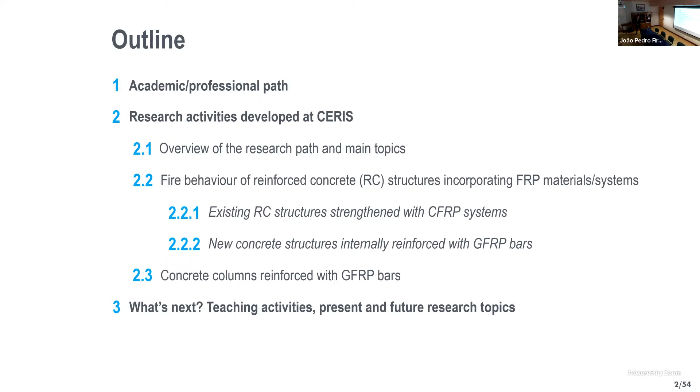Some personal facts: I was born in Cascais. I'm now 37 years old. I'm married, father of 2 boys, Francisco and Pedro, 6 and 5 months old. My basic education was done in Sintra, where I currently live.

My university education was done here at Técnico. I got my master's degree in civil engineering, specialization field of structures, in 2010. Then I proceeded with my PhD studies, also here at IST, which I concluded in 2015. In both cases, I was supervised by Professor João; in the case of my master's thesis, Professor Paulo França was also here at IST.

And my PhD thesis, as I said, was supervised by Professor João and also by Dr. Mário Arruda. During my PhD studies, I spent a few months abroad at the University of Edinburgh.

So my PhD studies were funded by an individual FCT scholarship. Then I applied and succeeded to an individual postdoc FCT scholarship, hosted by CERIS and ISISE. At the middle of this 6-year scholarship, I was hired by EIB and hosted by CERIS as a junior researcher. At the middle of this 6-year contract, I applied for an individual contract from FCT as auxiliary researcher, and very recently I was hired as assistant professor at IST.

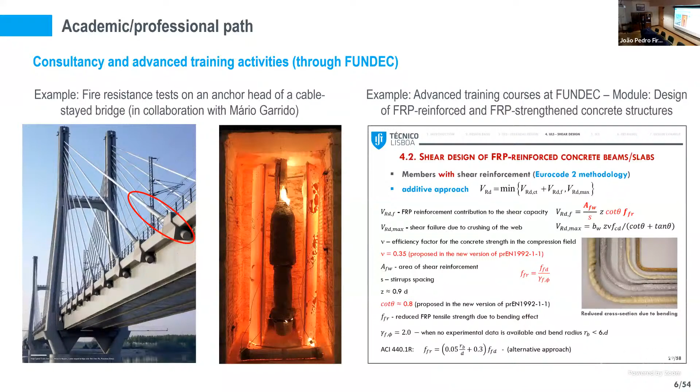This slide shows some examples. On the left, some pictures of work I was involved with in collaboration with Mário Garrido, where we helped a company develop a fire protection system for the anchor head of a cable stay bridge. We also did tests here at IST to validate this system. Here is a picture of the protected anchor head, and this is the system after the fire resistance test. On the right, some examples of training activities I've been involved in, where I was responsible for a module of one course regarding the design of concrete structures with FRP materials and systems.

So, moving on to the second part of this lecture.

But first, I would like to acknowledge all the people that made this research possible, especially the PhD students that I was lucky enough to supervise across these years. Special thanks to Wallace, Inês, Pietro, Adriana, and Elisa. This is truly a teamwork.

The research that I'm about to show you is the result of our work. Special thanks to Mário Arruda, who has been supporting all the numerical studies I've been involved with during the last years. Also, a special thanks to the laboratory technicians who made all the experimental tests possible. And last but not least, my scientific supervisor, but more than that, my mentor and role model, Professor João Correia, since the first time we started working together back in 2009.

So it has truly been a teamwork, and what I'm about to show you is the result of this teamwork.

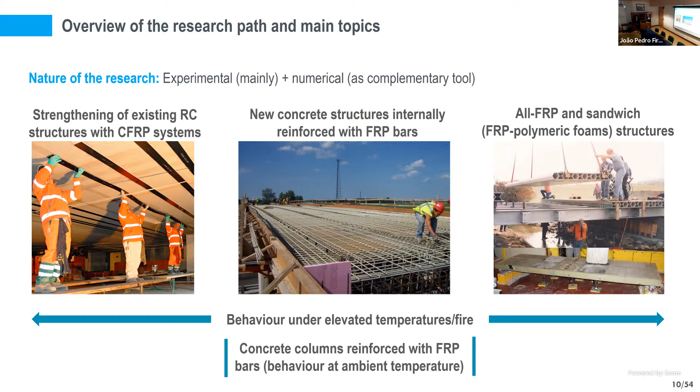So the first topic, my first steps in research at CERIS, started in 2010 with the development of my master dissertation in civil engineering on the fire behavior of RC structures strengthened with CFRP systems. I continued researching this during my PhD and then during the postdoc phase of my career, supervising one PhD student and six master students developing dissertations related to this topic. This research was funded by three research projects.

Later, in 2016, I started working on concrete structures internally reinforced with GFRP bars. This was part of my postdoctoral program that I applied for with FCT, but also anchored in the supervision of two PhD students and six master students who developed their research on this topic. This research was funded by an FCT project and is being funded by CERIS in an ongoing internal project.

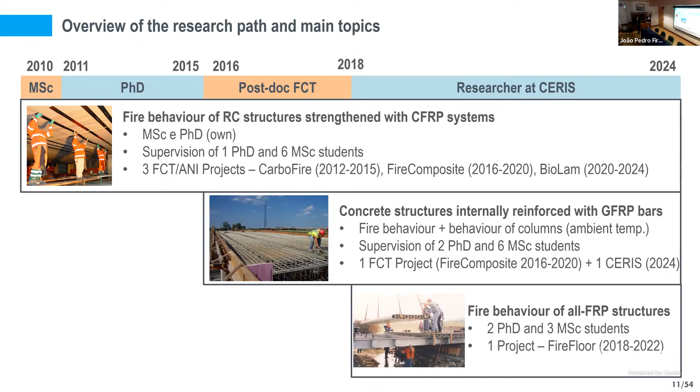The last topic I started working on in 2018 was the fire behavior of all-FRP structures, anchored on the supervision of 2 PhD theses and the contribution of 3 master students, funded also by 1 FCT project. So now, describing very briefly some highlights of the research on the three topics I mentioned, starting with the fire behavior of RC structures strengthened with CFRP systems.

To give you brief context and motivation for this topic: these systems have been successfully used over the last 3 decades to strengthen existing RC structures, and there is a significant number of applications worldwide where these systems are applied for concrete confinement, flexural, and shear strengthening.

Although they behave very well and are now being designed worldwide, there is also a well-known problem with this system, which is fire behavior. These systems do not present a very good fire behavior because both materials involved, the FRP material and the polymeric adhesive used to bond the FRP to the concrete surface, are highly affected by temperature. When heated, these materials undergo a glass transition process, and during this process their properties are highly affected. We can see the reduction of material properties of both the FRP materials and the adhesive, and the adhesive is much more affected by temperature than the FRP itself.

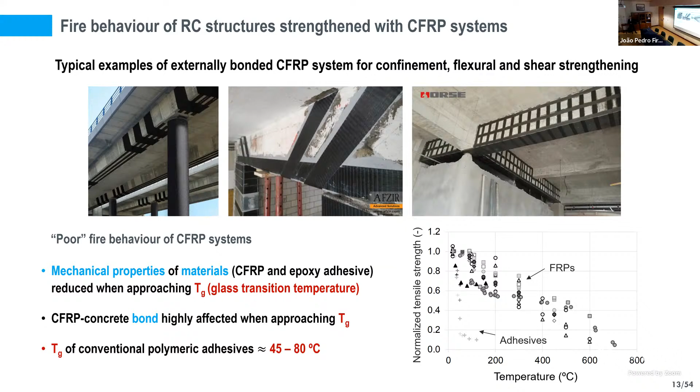As the adhesive is responsible for connecting the FRP material to the concrete surface, the bond behavior is highly affected. When we started investigating this topic, research was relatively scarce, and the design codes available at that time recognized the problem but did not provide a solution for it. So a designer wanting to check the fire safety verification of these systems had no information available. This was the starting point of this study.

The first step was done in my master dissertation in 2010, where we did some preliminary tests on this topic, and the conclusions were interesting at that time. We did fire resistance tests on beams strengthened in flexure with CFRP systems, and concluded that if we protect only the anchorage zones of the system, the CFRP system was able to withstand load and contribute to flexural strengthening, even after the bond of the CFRP to the concrete was destroyed at the central point.

By protecting the anchorage and insulating the system, we were able to explore the contribution of the system through a cable behavior, as you can see. With this system, only providing insulation at the anchorage, we observed that we were able to attain 23 minutes of fire resistance, which, by the way, is not enough for typical building requirements.

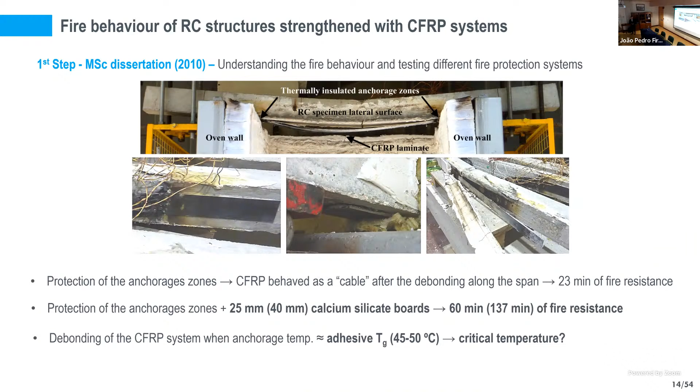But we also confirmed that combining insulation of the anchorage zones with additional insulation at the central part of the system, we were able to attain fire resistance times that fulfill typical building application requirements. And we also concluded that probably the glass transition temperature of the adhesive could be considered as a critical temperature to be used in the design and safety verifications of this system when related to fire safety.

So the first step was my master thesis. Then we proceeded with this investigation during my PhD thesis, where we decided to investigate this topic in further depth. For that, we divided the research into two main parts. First, we focused on a deep understanding of the bond behavior of CFRP-concrete interaction at elevated temperatures.

For that, we designed an extensive experimental campaign. Those tests were performed at LNEC, and this was complemented by numerical studies. Then the second part of the study was at a different scale of analysis. We moved to the structural member scale, where we tested beams and slabs under fire, combining fire resistance tests with numerical analysis.

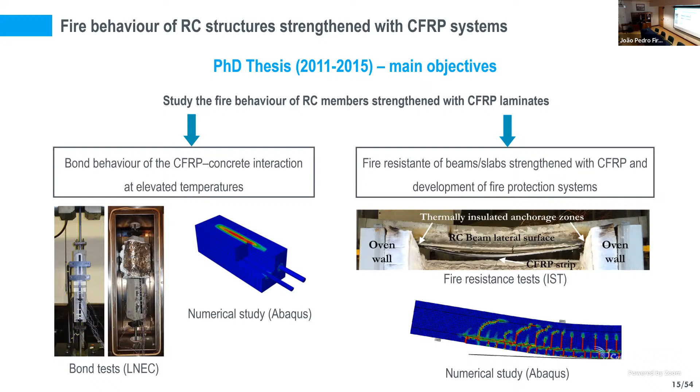Regarding the first part, the study about the bond behavior of the CFRP to the concrete, we decided to investigate the influence of different parameters that I will not describe in detail here, but we studied the influence of different application techniques: EBR, which stands for externally bonded reinforcement, where the CFRP is bonded at the surface, and also NSM, where the CFRP material is bonded inside grooves opened in the concrete cover. We investigated the influence of different parameters, configurations, and materials.

With this experimental campaign, we were able to obtain new data for the literature at that time, providing results about bond strength reduction with temperature for all these strengthening system configurations, also providing new data regarding stress distributions along the bonded length and how these stress distributions change with temperature and across different materials.

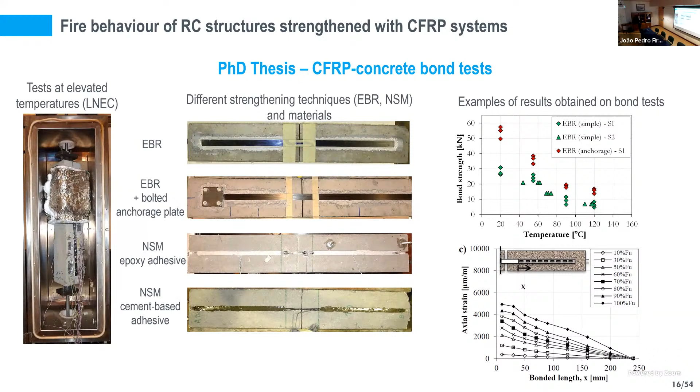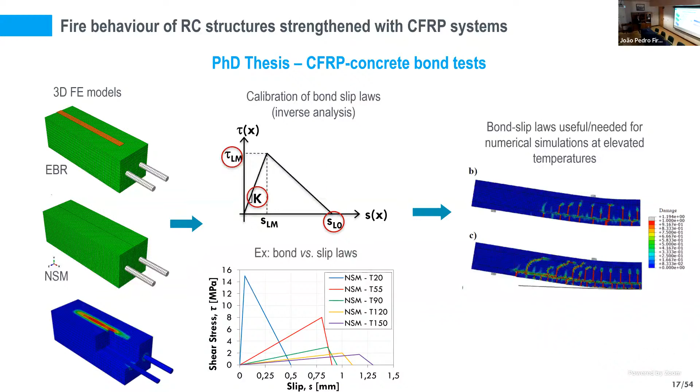Using new data available at that time in the literature, we were able to calibrate bond slip models, also new to the literature. These bond slip curves were very useful and important for numerical simulation analysis of concrete members strengthened with these systems under fire. With these calibrated bond laws, we were able to explicitly simulate the debonding of the CFRP system during fire, which was a significant advance in the literature at that time.

But those numerical models needed to be calibrated with experimental data, so we also performed fire resistance tests to compare with numerical results. Here is the fire resistance test setup at CERIS laboratories, where we use a furnace that follows a typical standard fire curve.

This furnace applies a heating curve to the bottom part of the member being tested, which is subjected to the fire action and simultaneously to a constant load. In this case, we adopted a 4-point bending configuration, simulating a typical load scenario expected in a fire load combination.

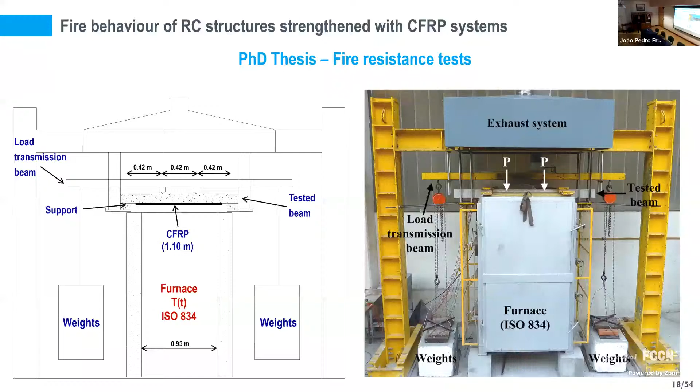These were the tests performed at that time, with some pictures exemplifying what we observed. When the CFRP system was left unprotected, we confirmed that it is very susceptible to fire action - the system debonded after only 2 minutes of fire exposure when left unprotected.

Applying the fire protection system only to the anchorage zones, we were able to exploit the cable behavior I mentioned before, and with this we extended the fire resistance up to 15 minutes.

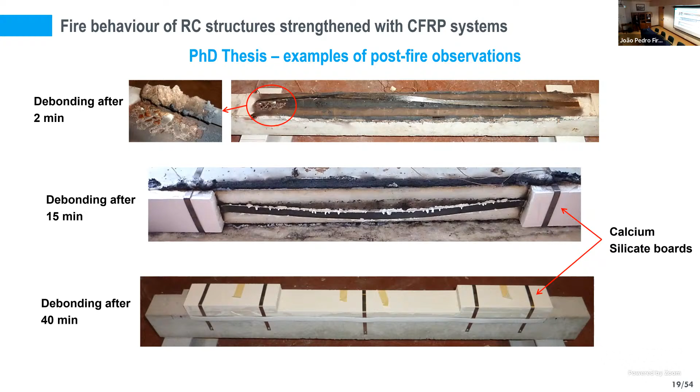Again, not enough for typical building requirements, but combining thicker insulation at the anchor zones with thinner insulation elsewhere, we were then able to extend the fire resistance of the strengthening system, which was our initial goal.

So with the different configurations of fire protection and materials that we tested, we were able to find a solution for the problem described before.

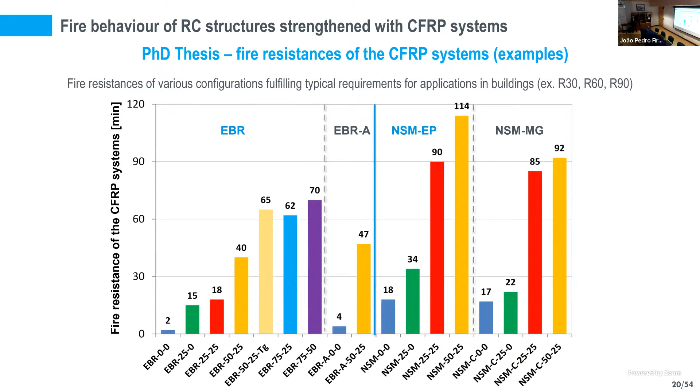But designers usually don't have time to perform such complicated numerical simulations as those I mentioned, nor the time and means to perform fire resistance tests as I did in my PhD thesis. So at the end of my PhD thesis, our goal was to draft and propose a simplified design methodology for the design of fire protection.

We proposed a very simple methodology based on exploiting the cable behavior I showed before, which can be defined in two main parts. For the design of the thickness of fire protection at the anchorage zones, this thicker layer of protection is defined based on critical temperatures we also defined during my PhD. The thin layer of protection for the central part of the system should be designed to avoid tensile failure of the FRP material.

The material should be designed to avoid exceeding a certain limit temperature, to avoid that tensile failure of the FRP that I mentioned before.

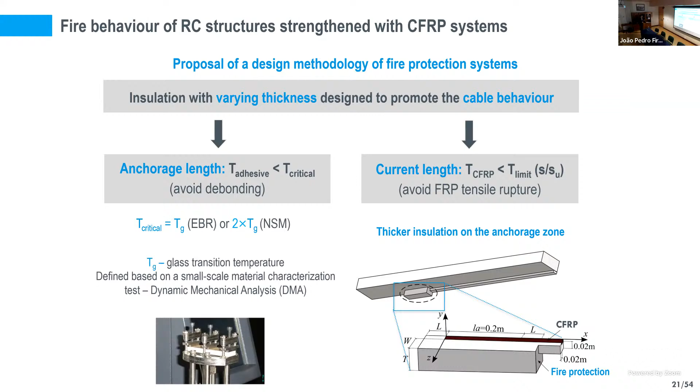In terms of main contributions of this research, significant new data was provided to the literature regarding the CFRP-concrete interaction, and also regarding the mechanical contribution of the CFRP during fire, which was one of the main topics not fully understood in the literature. One of the main contributions was the design methodology I just mentioned, to protect the systems and fulfill typical building requirements.

At the end, we were really happy to see that this research was recognized in one of the most adopted design codes for these systems, which mentioned our study and our strategy of applying thicker insulation at the anchorage as a possible reference to solve the problem related to the fire resistance of CFRP systems.

We were also happy to see our publications used in real-world applications. Here I show a picture of a real-world application in Portugal, where fire protection was designed. I was in direct contact with the designer of the system, and he actually used our results and publications to select the fire protection for that concrete slab strengthened with CFRP systems.

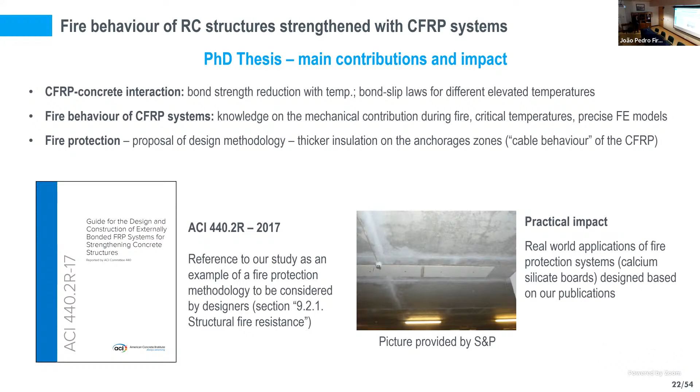So that was the study I did during my PhD, but that topic was further investigated during my postdoctoral research, in the framework of my postdoctoral FCT scholarship, and also an FCT project that funded that research after my PhD, highly anchored on the PhD thesis of Adriana Azevedo, and also receiving contributions of master students who developed their dissertations in these topics. The objectives after my PhD were to consolidate the research I developed previously, making improvements on the experimental and numerical methods used during my PhD, but also expanding that knowledge to other variants of CFRP strengthening. We also established collaboration with associated industry and other institutions to proceed with the investigation on this topic.

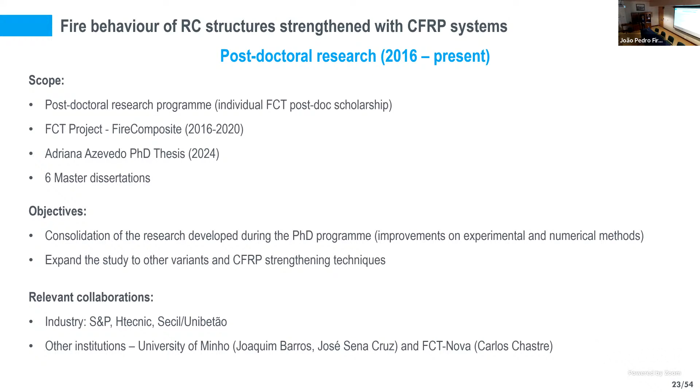Let me show you some examples of the improvements we made on this topic. Here I show one of the improvements we did on the experimental methods used to characterize the bond behavior of the CFRP systems to concrete at elevated temperature. During my PhD, here at Técnico, we did not have the experimental capabilities to test or characterize this behavior, but during my postdoctoral research, we managed to find the means to do these tests. We developed this test setup that allowed us to complete, in a more detailed way, the experimental results and knowledge previously acquired during my PhD.

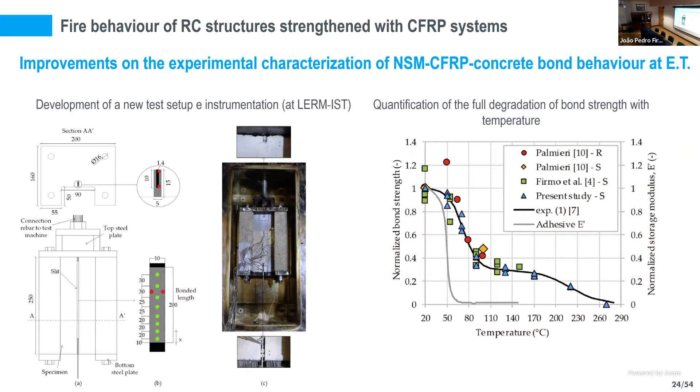We were also able to develop a numerical tool that uses the experimental data from the bond tests to calibrate local bond-slip laws in a much more automatic and optimized way than I did during my PhD. So this was also an additional development on this topic.

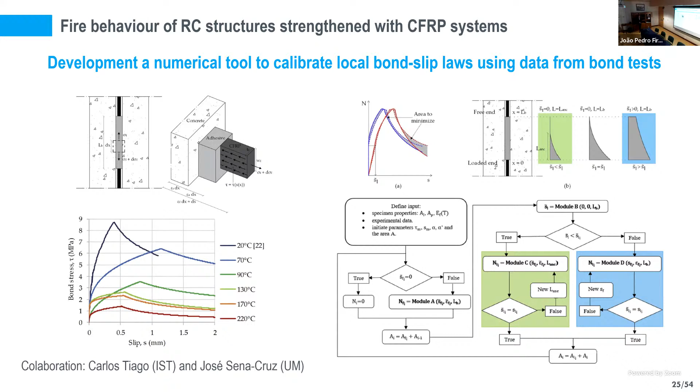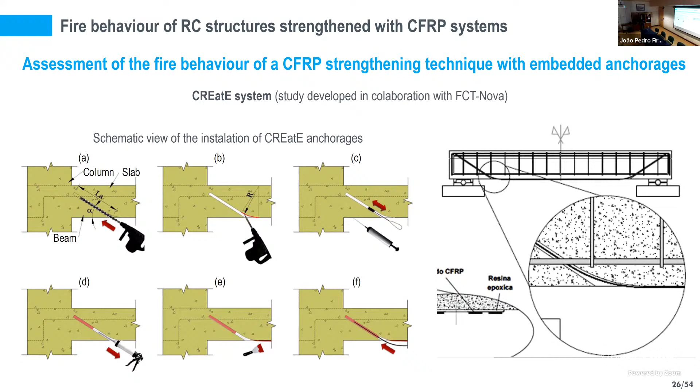We also assessed the fire behavior of different variants of CFRP strengthening systems. Here I show one of these systems, a CREatE system, which is basically anchoring the CFRP laminates into holes drilled at the anchorage zones of the CFRP system, close to the supports, providing better anchorage capacity. We assessed the fire behavior of this system, and for that we designed a new experimental campaign where we directly compared the fire behavior of these systems with the NSM system, the CFRP laminates bonded inside the concrete cover, and with the traditional technique where the CFRP is bonded at the surface.

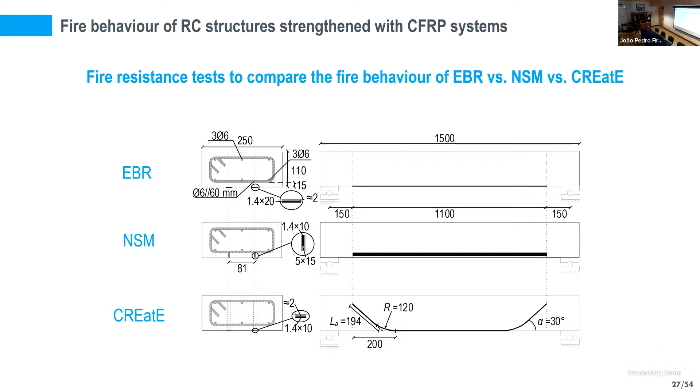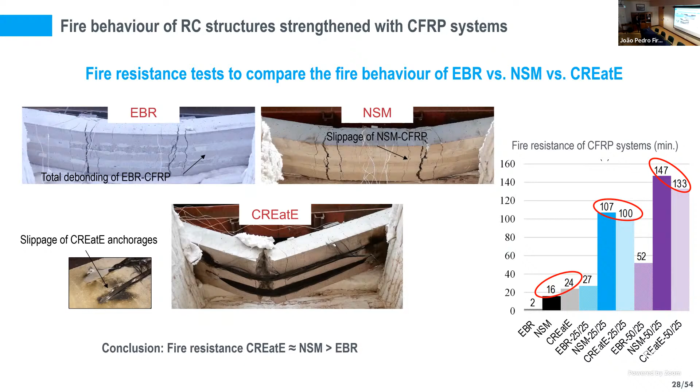The main conclusions of this study were that both the CREatE system and the NSM system behave much better under fire than the traditional EBR system. Using the methodology for fire protection I mentioned before, we were again able to attain fire resistance times that fulfill typical building requirements for common applications.

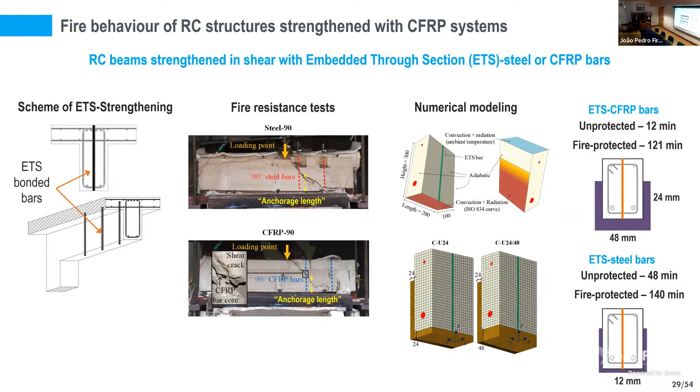Finally, we also investigated the fire behavior of RC beams strengthened in shear with the ETS method - embedded through section method - where the strengthening material is bonded inside holes drilled at the middle of the cross section of the concrete member. For that, we developed a new test setup complemented with numerical modeling, and concluded that when unprotected, these systems are relatively susceptible to fire, with relatively low fire resistance times, but we were also able to provide some solutions to increase that fire resistance. This is only one slide summarizing the study, but this research, including the development of the test setup and calibration of numerical models, took more than 2 years.

Moving on to the next topic: fire behavior of new concrete structures internally reinforced with GFRP bars. This study was developed in the framework of my postdoctoral research program submitted to FCT, funded by an FCT project, anchored by Inês Rosa's PhD thesis, and with contributions from 6 master dissertations. We were able, in the framework of this research, to establish very relevant contributions with associated industries, especially world-recognized producers of these bars.

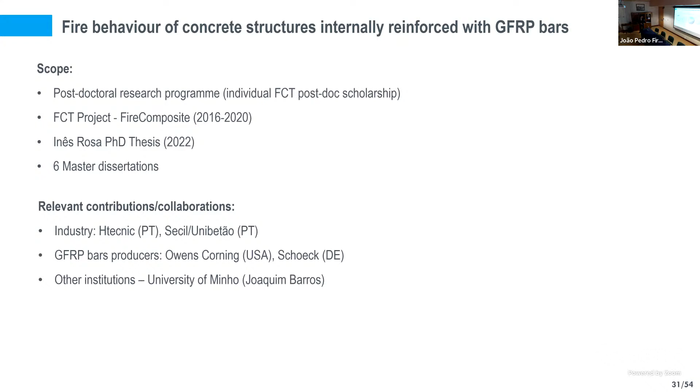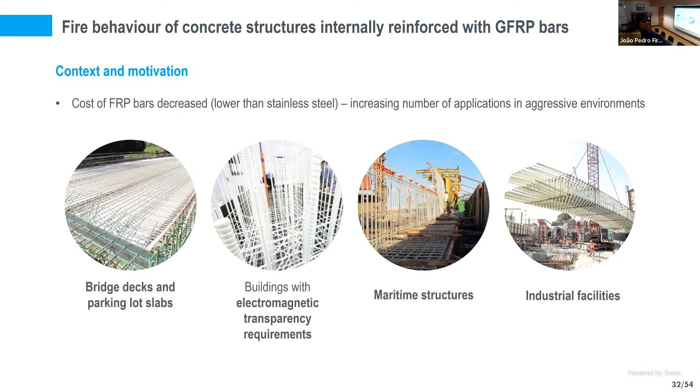To give you brief context and motivation for this study: applications of GFRP bars as an alternative to conventional steel bars are increasing worldwide. We now have a significant number of applications where durability of conventional steel reinforced concrete would be a problem, so this is an alternative to stainless steel reinforcement. The increasing number of applications is due, on one side, to the reduction in prices of these bars, but also to the technological maturity of these materials and the knowledge that has been produced.

So the advantages of these technologies are very well known. These FRP bars are very light. They present a very high strength, but the main advantage is that they do not corrode.

However, they present a brittle behavior. The elastic modulus, especially when dealing with GFRP (glass fiber reinforced polymer) bars, is relatively low when compared to conventional steel. Bends are possible, but they are still made on factory.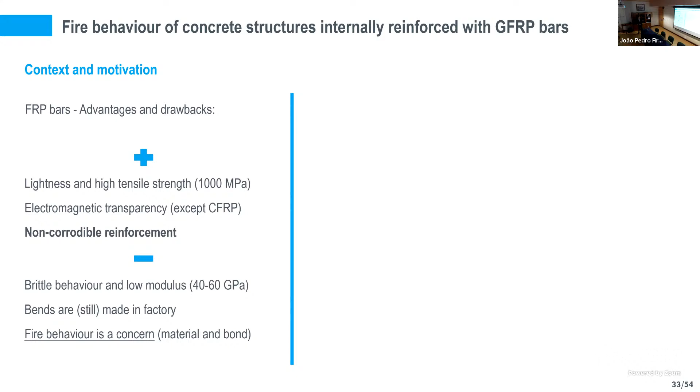And the problem, one of the biggest problems of this technology, was the fire behavior, which was our main focus on this research. And in fact, the research community also recognized that problem, not only because the FRP material degrades very fast with temperature, but also the bond of the FRP bar to the concrete is also highly affected by temperature.

Codes that were available at that time recognize the problem, but they do not provide concrete solutions, or they provide very conservative recommendations for designers.

One of these recommendations I would like to mention is the one provided by the Canadian Code, which said that to have a concrete member reinforced with GFRP bars with 60 minutes of fire resistance, we should adopt a minimum concrete cover of 60 millimeters - this for an FRP bar whose main advantage is not being susceptible to corrosion.

It's a non-rational use of these bars, because if you are adopting a very high concrete cover to solve the fire issue, we are not taking advantage of the high durability of this material.

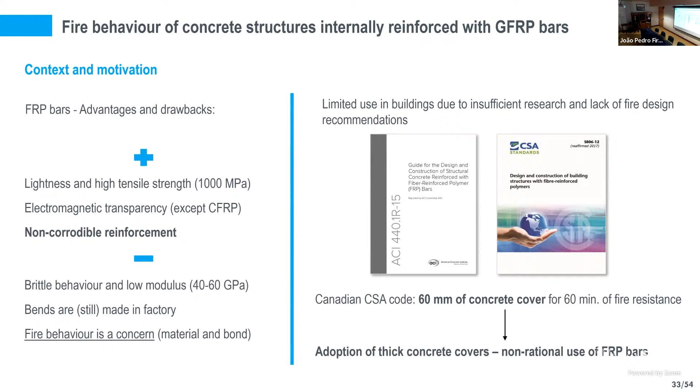So when we started studying this problem, this was the context. We tried to provide some answers and new solutions to this problem, and for that we designed a research campaign that involved different scales of analysis.

At the material level, we first started characterizing the GFRP bars at elevated temperatures, determining the tensile strength and the elastic modulus at elevated temperatures. Then we moved to the scale of the connection between the GFRP bars and concrete at elevated temperatures.

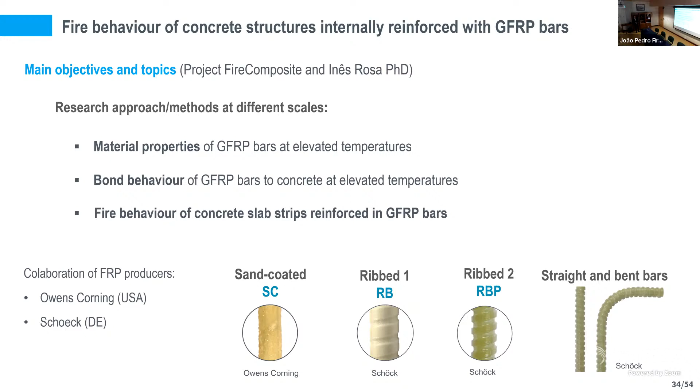At a different scale of analysis, we moved to the fire behavior of concrete slab strips reinforced with these bars. We established a collaboration with FRP producers that provided us different types of GFRP bars with different surface finishes and also different geometries, and we assessed the influence of all these parameters.

So on the first scale of analysis, we were able to quantify the degradation of the tensile strength and elastic modulus of the different types of GFRP bars, which is a basic material property that we needed to proceed with this investigation.

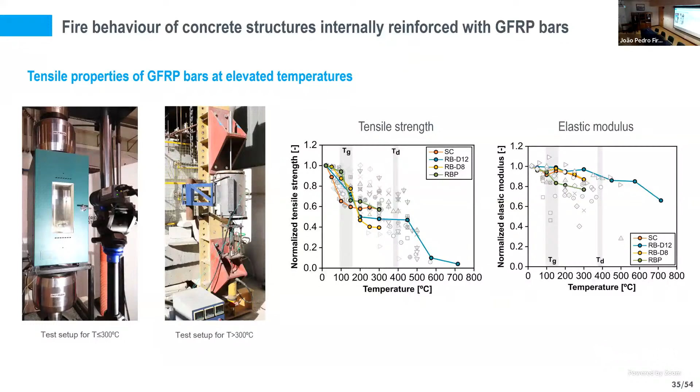But the results available at that time in the literature were very scarce. And although it seems to be a simple test, it's quite challenging, and we provided new data to the literature on this topic. Then we moved to the bond behavior of these bars to concrete at elevated temperature.

We did direct pull-out tests with different bar configurations. We also combined experimental study with numerical simulations, and we were able to quantify the degradation of the bond strength of different types of bars with temperature, and also provide, using numerical parametric studies, recommendations for the development length of these bars as a function of temperature and for different geometries.

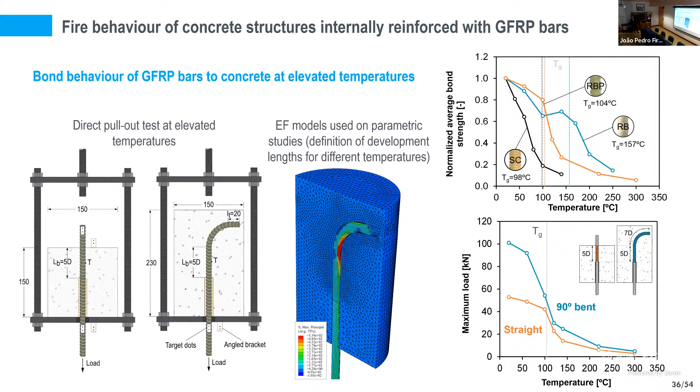Then at a different scale of analysis, we proceeded with fire resistance tests of concrete slabs using a test setup similar to the one I showed you before, where we adopted a very thin concrete cover, much thinner than the one recommended by the Canadian code.

We wanted to demonstrate that it would be possible to adopt very thin concrete covers for these bars and still have good fire resistance, so we combined the experimental campaign with numerical simulations.

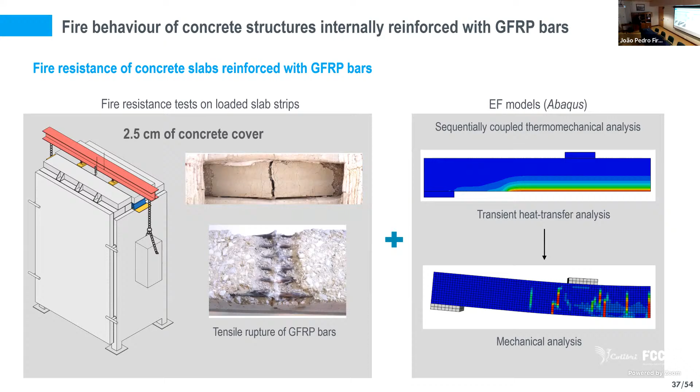In the experimental campaign, as I told you before, we adopted concrete covers of only 25 millimeters, and by adopting this thin concrete cover but guaranteeing that the anchors of the bars were kept cold during fire, we were able to attain significant fire resistance, above 2 hours.

We also investigated the influence of lap splices of the rebars, where we intentionally introduced lap splices at the fire-exposed area to promote bond failure and investigate the influence of that bond failure on the fire resistance of the overall member. We concluded that with straight lap splices, the fire resistance was, as expected, very low, below 30 minutes, but using bent-end lap splices, we were able to extend the fire resistance quite significantly.

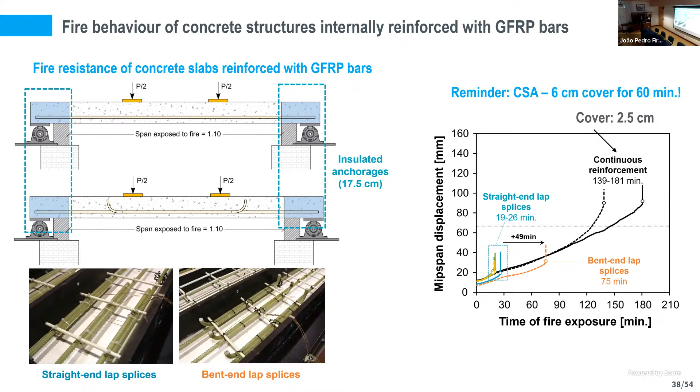With the bent ends of these bars at the end of the lap splices, we were able to explore not only the mechanical anchorage provided by this bend, but also the fact that the top part of this bar is anchored at the cooler region of the concrete part. Here are some pictures of the slabs after the fire tests. With continuous reinforcement, the slabs failed due to tensile failure of the rebars in tension, whereas with the spliced bars, failure occurred as expected due to rebar slippage inside the concrete.

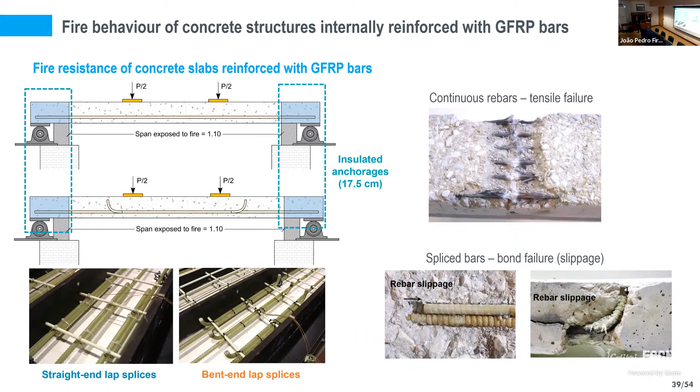At the end of these studies, we provided significant contributions, not only with the wealth of experimental data that were new at that time to the literature, but also with the bond slip laws needed to simulate these complex problems. In the end, we were able to draft fire design recommendations and provisions regarding the concrete cover thickness, and the position and geometry of the anchorage zones and lap splices. These draft fire design provisions can be considered in updated versions of design codes on this topic.

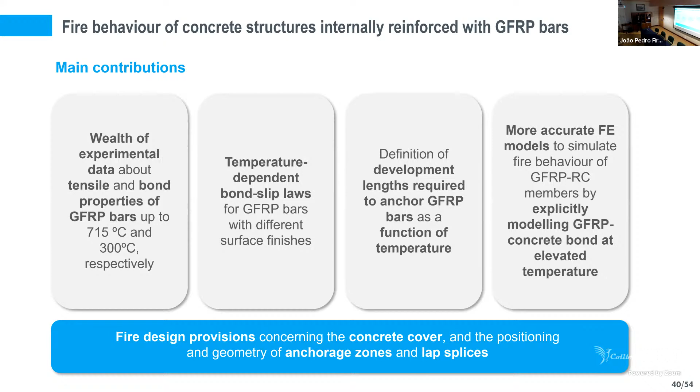Moving on to the last topic I would like to show you today, which is concrete columns reinforced with GFRP bars. This study was developed in the framework of Wallace's PhD thesis, and we also collaborated with LNEC on this study, where we provided some of the experimental tests, and we also collaborated with a GFRP bar producer.

The motivation of this study was, well, not very good, let's say, because most codes for the design of concrete structures with GFRP bars do not recommend the use of these bars in concrete columns, especially those subjected to lateral loading. So in seismic areas, the code says please do not use these bars.

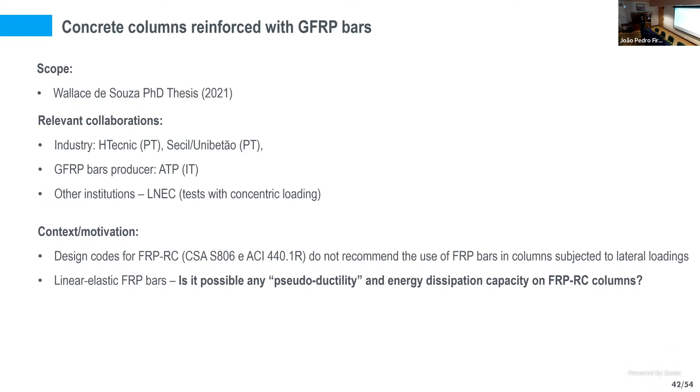These GFRP bars are elastic to failure. Columns present mostly a brittle failure. So this was the starting point. Our goal was to try to assess if there is any possibility to have pseudo-ductility or dissipation capacity in concrete columns reinforced with these bars. This was the question we were trying first to understand and then try to answer and provide solutions.

For that, we designed a combined experimental and numerical study, where we tested real scale concrete columns reinforced with GFRP bars, subjected to axial loading - tests that we performed at LNEC - and concrete columns with the corresponding footing system that we tested under constant axial load and subjected to monotonic lateral loading or cyclic lateral load.

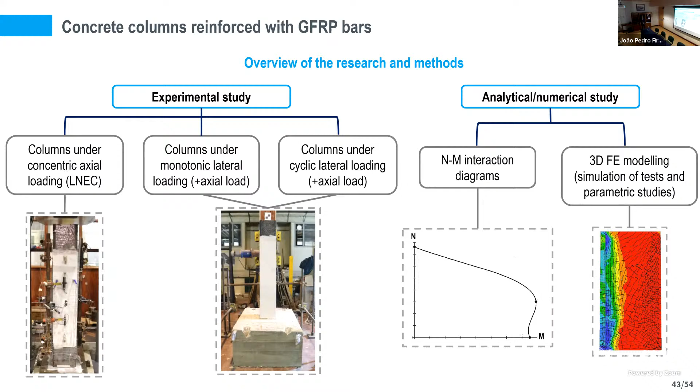Some examples of the rebar configurations that we adopted: of course we also tested a reference steel reinforced concrete column, and GFRP concrete columns with longitudinal GFRP bars and also closed GFRP ties that were specially manufactured by the FRP producer. We also assessed the possibility of taking advantage of combining longitudinal GFRP bars with stainless steel bars. The goal was to assess if we could improve the energy dissipation capacity by exploring the yielding stage of the stainless steel bars, while still maintaining the high durability of the system.

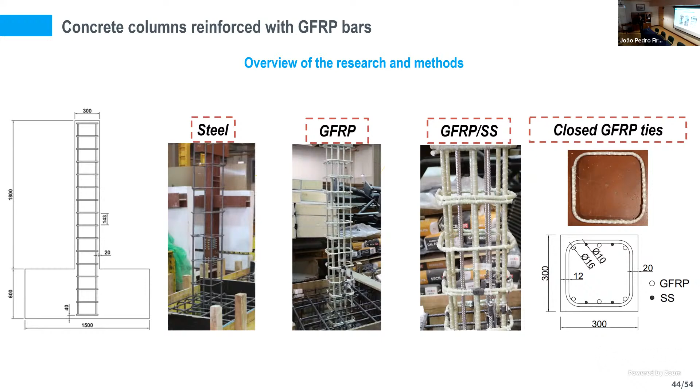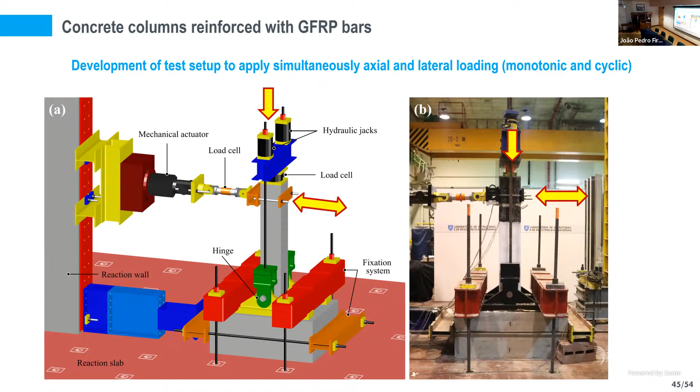For that, we developed experimental tests here at CERIS laboratories. The columns and the footing were pre-stressed against the strong floor of the laboratory. We designed a test setup that was able to maintain a constant load on the concrete column while lateral displacement was applied to the columns, either monotonic or cyclic. For the cyclic loading, we adopted the typical loading protocol with increasing amplitudes of lateral displacements.

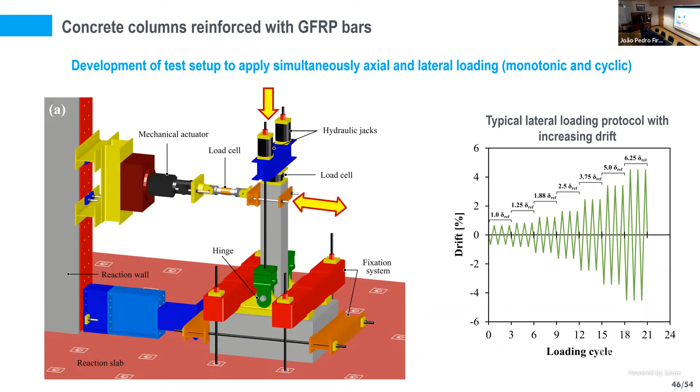These are the main conclusions we obtained in this study. We confirmed that we can design concrete columns with GFRP bars with similar lateral deformation and load capacity to equivalent steel reinforced concrete, although we need to adopt a much higher area of GFRP rebars as a result of their lower elastic modulus. We also confirmed the lower ductility and energy dissipation capacity of GFRP RC columns, but we showed that this low ductility can be improved if we increase the deformation capacity of the concrete under compression, which we can do by improving the confinement.

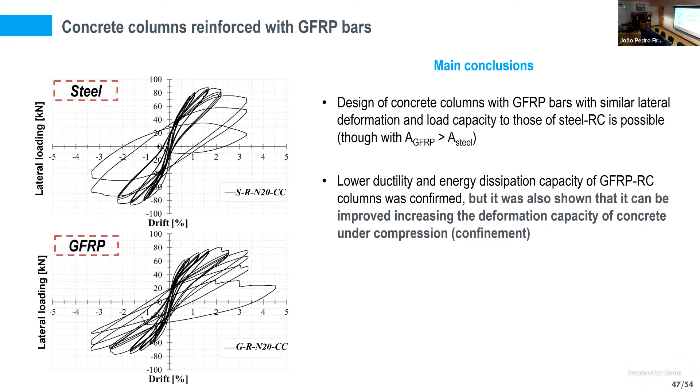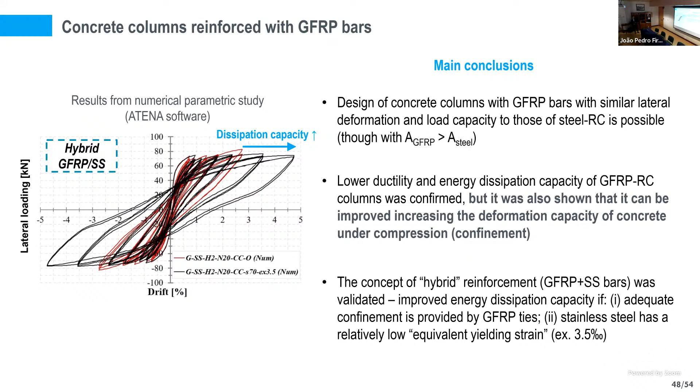Regarding the combination of longitudinal GFRP bars with stainless steel bars, we confirmed that the concept can work. We confirmed that we can actually increase the energy dissipation capacity by introducing stainless steel rebars combined with the GFRP ones. But for that, we need two main conditions: we need to provide appropriate confinement for the concrete under compression, and we need to adopt a stainless steel bar with a relatively low equivalent yielding strain, so that we can explore the yielding stage of these bars before the GFRP bars fail - which typically fail under compression in this application.

So now, just to finalize my lecture, I would like to mention what are the teaching activities that I'm currently involved in.

On the first semester, I'm teaching Concrete Structures 1. Then in period 2, I will start teaching Rehabilitation and Strengthening of Structures. Period 3, I will be teaching Concrete Structures 2. And in period 4, I will be teaching Composites for Civil Engineering Structures, and I will also have some contributions on other 2 courses.

One thing I would like to be involved with, and of course this still needs to be discussed with the scientific area, would be the implementation of experimental teaching methods. I recognize it's very challenging at this stage, but I think it would be a good methodology to attract more students to the scientific area of structures.

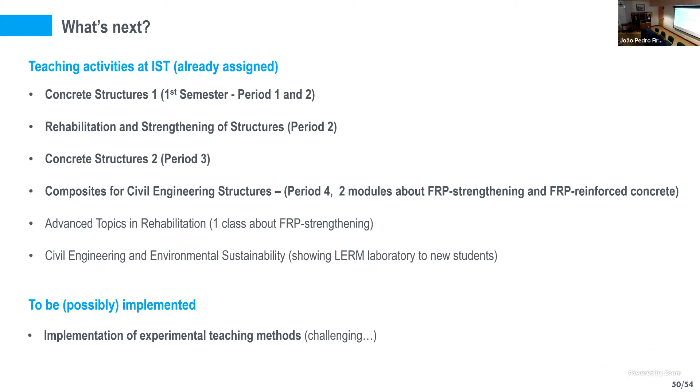In terms of research topics, I'm currently working on the fire behavior of precast concrete buildings in the framework of an ongoing PRR project. I'm also still working on the fire behavior of concrete structures internally reinforced with GFRP bars, but now using thermoplastic bars, in the framework of ongoing research projects here at CERIS.

I would like to continue working on the behavior of concrete structures reinforced with GFRP bars under cyclic and seismic actions, following that study I showed you before on the columns, but now focusing on the connection between beams and columns, and addressing how the ductility and energy dissipation capacity can be promoted.

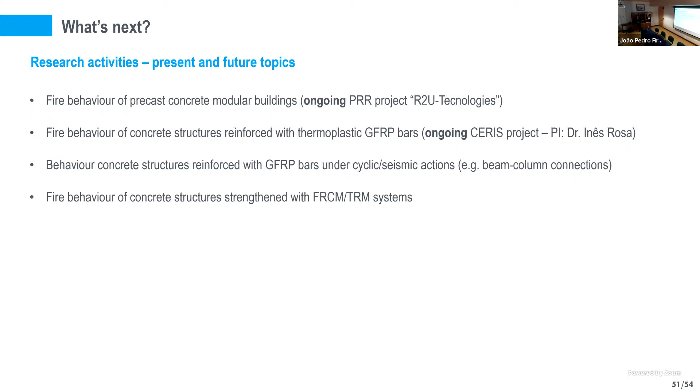I would also like to start working on the fire behavior of concrete structures strengthened with FRCM or textile-reinforced mortar systems. These systems are an alternative to FRP systems. Their use is increasing worldwide, and their behavior at ambient temperature is very good, but their fire behavior is still largely unknown. Using the knowledge and the experimental and numerical capabilities we have at CERIS, I think we will be able to provide significant contributions on this topic.

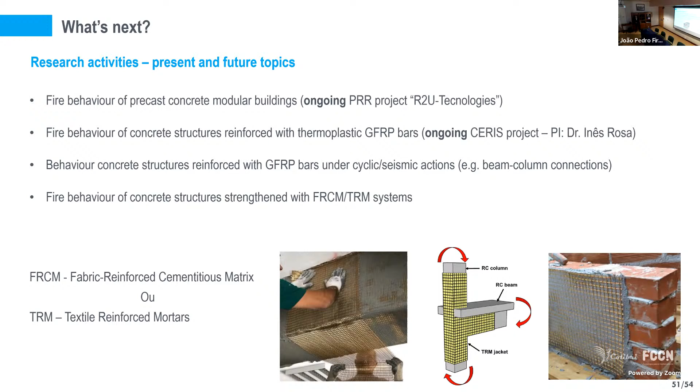And the last topic that I'm trying to get funding to start working on is the post-earthquake fire behavior of concrete structures strengthened with advanced systems.

The motivation for this topic is relatively easy to explain. The number of fires that happen after an earthquake is significant, and the numbers are very well known, as are the consequences. For example, here I show an earthquake that happened early this year in Japan. The buildings were able to withstand the seismic action, but here you can see the damage after a fire that occurred following that earthquake.

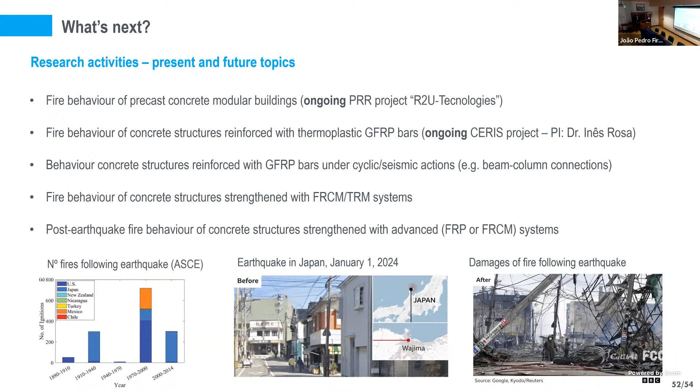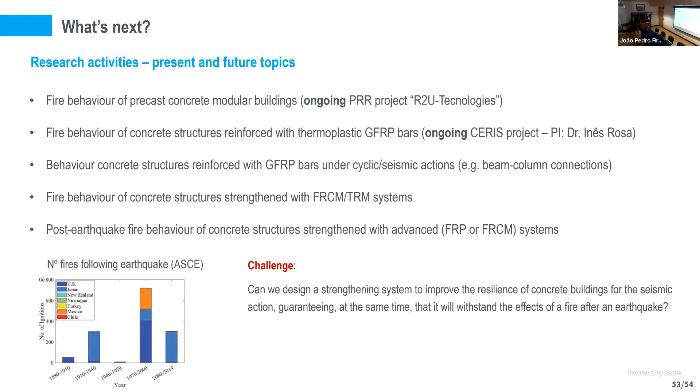So the challenge that I'd like to contribute to solving is this: can we design a strengthening system to improve the resilience of concrete buildings to seismic action, while at the same time guaranteeing that they will withstand the effects of a fire after an earthquake? That's a question I'd like to answer in the near future.

I have no conclusions yet for this first class, because this is just the beginning of a new journey at IST. So thank you very much for your attention. I'm available to answer any questions you may have.